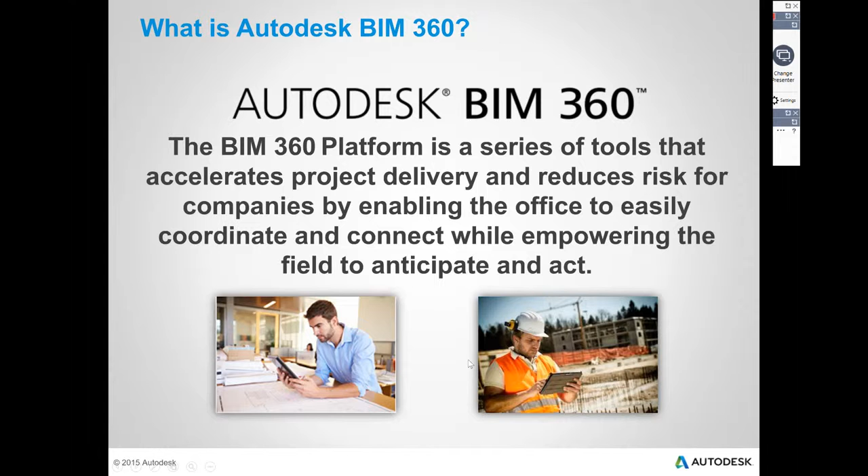So a key part of this is being able to access this data from really anywhere in the world on any device, and get to the information that makes the most sense for you. Again, it is an entire series of tools, and I'll show you a little bit more about those in a few moments.

Some of the things that we've been hearing about BIM 360 as a platform, and some common misunderstandings: that maybe it's only for the BIM manager, it's just a series of different tools, individual tools with a fancy name. Hopefully we'll dispel some of these myths and misunderstandings for you here in a little bit. Some people have said it's only for contractors, and that's definitely not true.

It's really built for design teams all the way through even handover of this data over to the owner of the building once the design is complete and handover is happening. It is a collection of apps. It does say iOS there on the screen, but we do have Android access as well now, iOS, web-based. So really, it's all about working on the device that makes the most sense to you.

If you're on a desktop PC, on a Mac, have access to a browser, you can get to this data. Or if you're on a mobile device, even all the way down, in some cases, to the phone level, you'll be able to get to this on a smartphone as well. And then some people just think that this just means Glue. And if you don't know what Glue is, we'll talk briefly about that here as well.

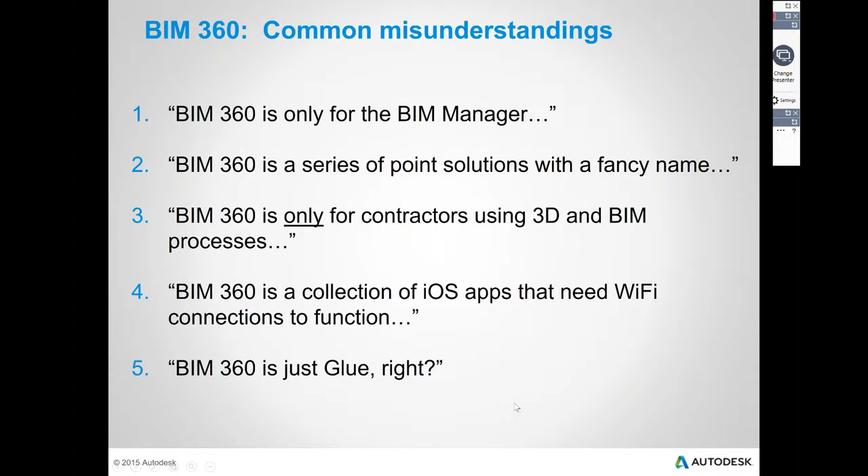So as we move forward here, let me give you an idea about this overall platform first of all. So let me go ahead and start building some of this out. We're going to start with that one called Glue right there. And I'll explain a little bit about how these different workflows, these different components of BIM 360 work. And then we're going to really dive in deep on BIM 360 Docs here in just a moment.

So BIM 360 Glue is a tool that is really used for the design and pre-construction phase. It allows us to essentially glue models together via the cloud, meaning that I can take disparate models, one from the architect, one from the mechanical engineer, another from the structural engineer. Each one of those disciplines can post or glue or host their models in the cloud. And then the other users can glue those models together and do things like clash detection and coordination on them.

Our next tool that works in conjunction with Glue, that you may not have heard about, is called BIM 360 Layout. BIM 360 Layout is really a two-part application. The first part is a plugin that runs on top of AutoCAD, Revit, and Navisworks that automates the placement of 3D points, these X, Y, and Z points, into your models, into your families if they're Revit, into the different components if they're AutoCAD or Navisworks. These 3D points describe the model in space. The second part of the app pushes that point data out to the iPad app to quickly connect with the guys in the field.

So this is really what it is. It's about connecting your entire design and construction project teams and all of your documents in one system. BIM 360 Docs is rapidly evolving. Since last January, we've consistently had about 2 releases a month, so the product is being rapidly iterated. In fact, if some of you had looked at Docs maybe 6 months or even a year ago and decided that it wasn't quite where you thought it needed to be, this is the time to go back and take another look at it, because it has come a tremendous way in a very short period of time and continues to evolve.

And Docs is really going to become the backbone for our cloud-based system. It will be the repository for all of your drawings, all of your models, anything else you might have for a project. But then those models will be accessible to all of these other tools, even to your desktop applications like Revit and Navisworks and AutoCAD going forward. So you can think of this not only as a document management tool, but also as a centralized repository that will allow your teams to assuredly have access to the latest and greatest information, unlike what you might be doing today, which might be some information stored locally on a file share in your own office.

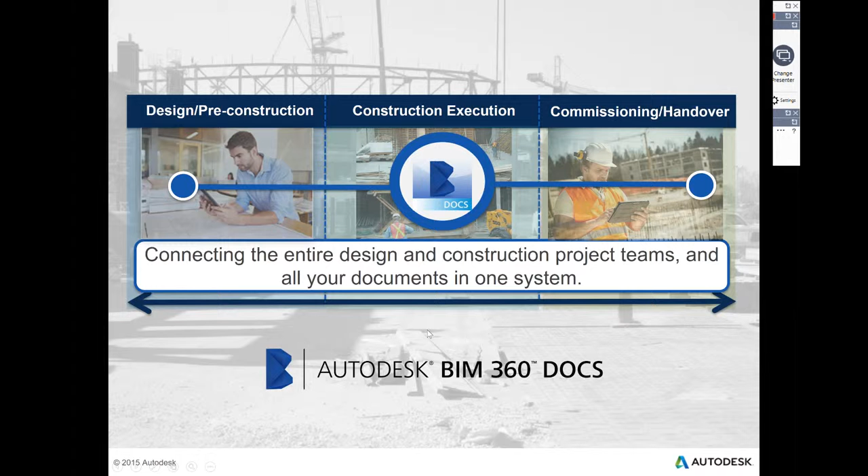My office used to have what we called our P drive for projects, and that's where everything was stored. And then I'd take a Revit file and email it to somebody, and as things like Dropbox and Box.net came along, and even before that, FTP sites, we'd make another copy and stick it on an FTP site. And before we knew it, we'd have documents all over the place, and nobody knew which was the latest and greatest, because we'd end up with file names like project file 1-final-final, right? We laugh about it, but I see it happening still today over and over again in architecture and engineering companies, people not understanding where the latest and greatest information is. So that's really the heart of BIM 360 Docs.

And so it is, again, designed for that entire team. I'm showing you a couple screen grabs here. Today I'm going to be doing everything off of the browser. Over the webinar systems, it's a little bit tougher to show you cleanly the iPad interface, but there's a ton of information out there. And in fact, we can have some AEC guys even follow up this webinar, including some links to where you can go get some additional information. There's screenshots, there's videos about the interfaces outside of the browser that I'm going to be running in today.

You can even see down here, down to the iPhone, or I shouldn't brand it, down to the smartphone level as well. I have an Apple phone, so I tend to call them iPhones. But really, the idea is anytime, anywhere access to any of the information you need by the entire project team, but also with the understanding that sometimes you can't always have online access, where you're on a job site that just has no Wi-Fi or no cellular, no mobile signal. So being able to get to this data, sync it down to your mobile device, and then have access to it even if there's not a good signal or no good Wi-Fi on the site.

Another key here is that the capabilities obviously are built around our tools, the Autodesk side of the platform, but we're not limited to hosting just Autodesk tools or Autodesk file formats in this platform. So even things like MicroStation DGN files or SketchUp files, or really anything you need, Microsoft Word documents, Excel, etc., can all be part of the information that you end up storing as part of this overall document management system. It's really meant to be a single source for you to keep all of your project data.

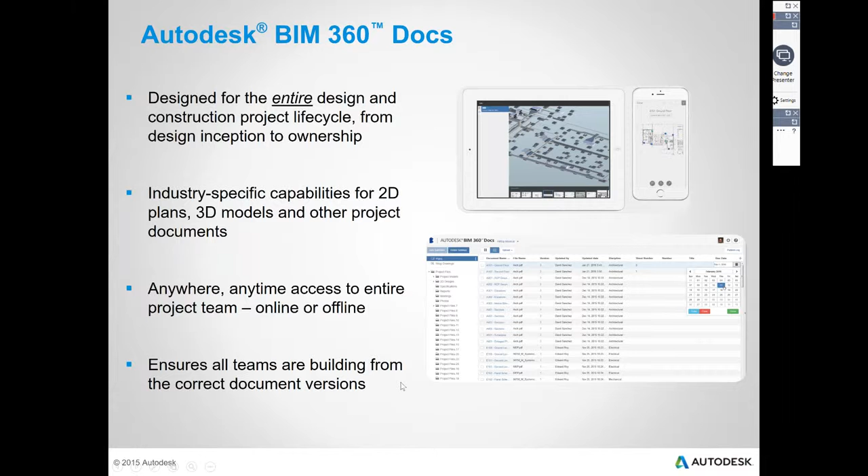But key here, it's not just 2D. There are other solutions out there that are competitors with Autodesk that are 2D only solutions. And they kind of hide the fact that they're only 2D, and really after you dive into them at some point you find out, well, what if I want to view a 3D model? And then they point you over to a third party or another application that you have to go download and ultimately pay for in order just to view 3D models. So ours is completely 2D and 3D from all of our applications and even beyond that, outside of the Autodesk realm of applications. Okay. And I mentioned this already, it's assuring that all the teams are building from the correct document versions at any time.

All right, so I told you I was going to go through some quick PowerPoint. So that was the PowerPoint deck. Pause for a moment, catch my breath. I tend to talk quickly about these things. And let me go ahead and fire up, there we go, back into my web browser.

But, as I was saying earlier, really what's going to happen is that these things currently today function as separate applications, but if you watch here coming soon, and I can't give away any exact dates, but just continue to watch our BIM 360 pages, what we're working towards is a really comprehensive solution where these things are all melded into one blue box where accessing one of them gives you access to all the different various tools.

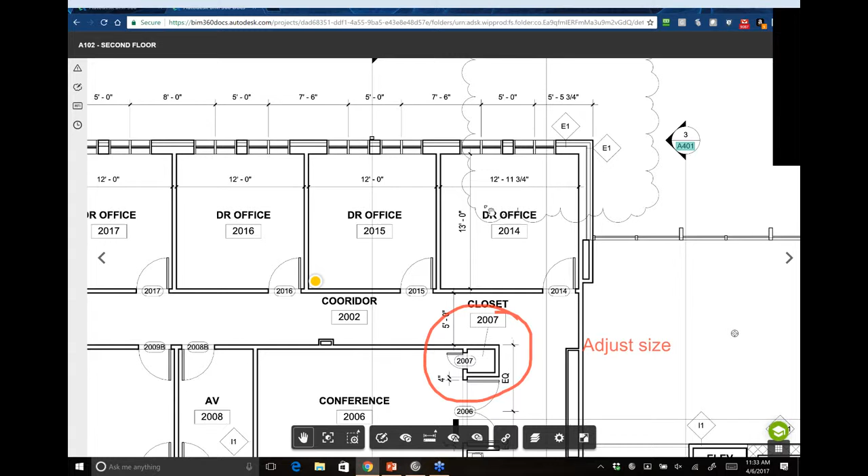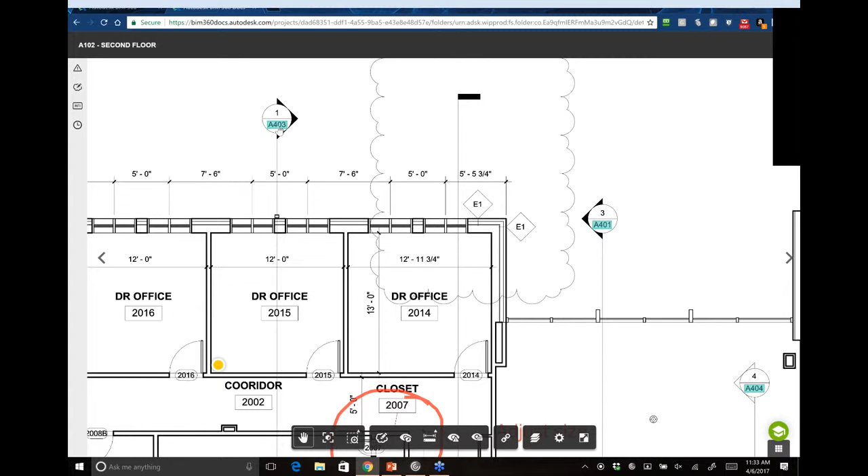So, in essence, it looks like a drawing file, right? And if you didn't know any better, if you were used to a PDF-based process, it looks like a PDF, right? And I'm going to explain some of the other stuff going on here in just a moment. We can browse around the sheet. You do see those hyperlinks that automatically came across. So, section 3 on A401, section 1 on A403. If I want to go explore that, of course, it's just a hyperlink. I just click on the blue box.

It gives me a thumbnail first to make sure that that's really where I wanted to go, and then I just click view, and it's going to take me to that next sheet, and then the next sheet, and then the next sheet. As far deep into the set as I need to go. And then if there's something that did not get automatically hyperlinked that I want to hyperlink on my own, we do have an add hyperlink button down here in the toolbar across the bottom, and that's what this other different color blue rectangle is, a hyperlink that was manually created to a different part of the document set, or even to a different document that's part of our BIM 360 Docs site.

So, maybe this went out to a spec section that was in another folder, and we could do that as well. And then if I go and maybe drill down here into another view deeper, we're going to build that return list over here.

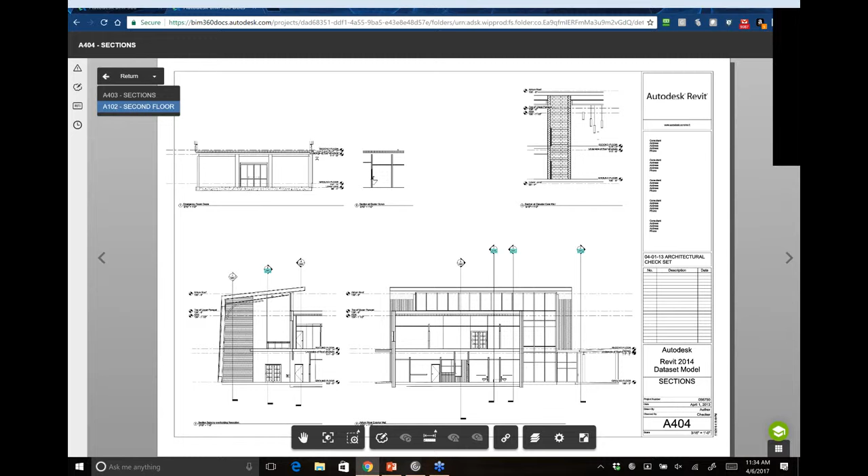That's going to allow you to go back, basically, if you need to go back a sheet or two sheets, or you've gone 10 hyperlinks deep building out this list, and you want to return all the way back to the very first sheet you're on. You can very quickly and easily go back.

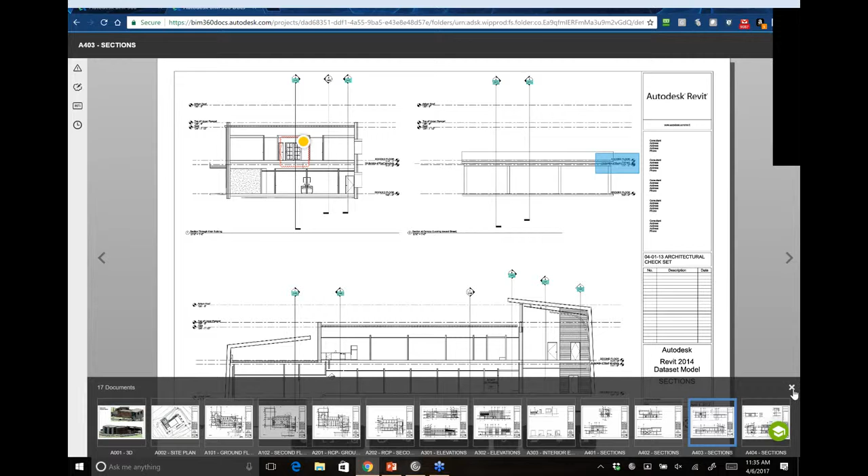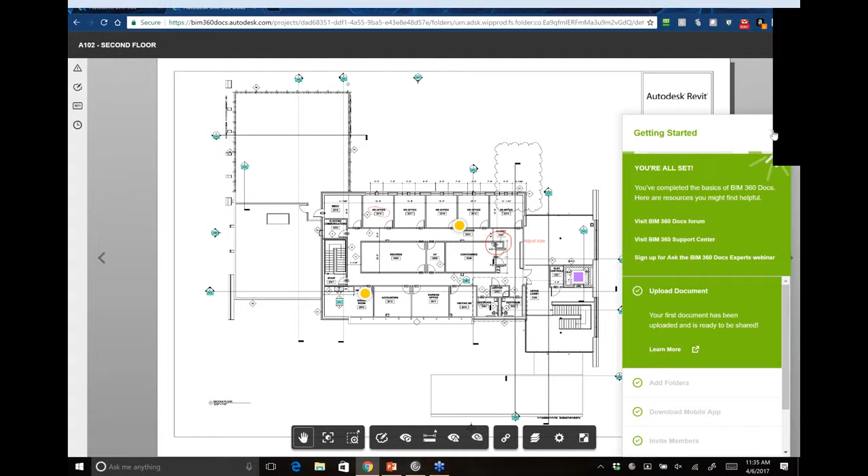I should point out, this little green scholar hat down at the bottom that looks like a graduation cap, that's your Learning Central. So if you have any questions along the way, or want to go through a quick how-to learning guide, you can click on this. It's going to bring up your Getting Started guide about how to upload documents, add folders, get to the mobile app, invite people to your project, so on and so forth. So you can get started in this BIM 360 Docs technology really, really quickly.

All right, so what are these other things going on here? I've got some yellow dots, a red markup with a little bit of text, and a purple square. Let me go ahead and turn a couple of these off for a moment. We're going to come back to them.

First and foremost is markups. Here are the toggles at the bottom, but right now I'm in the markup panel, which I can hide as well. I've got one markup right here that says we need to adjust the size of this room. Somebody left a note. Let's go figure out a little bit more about that.

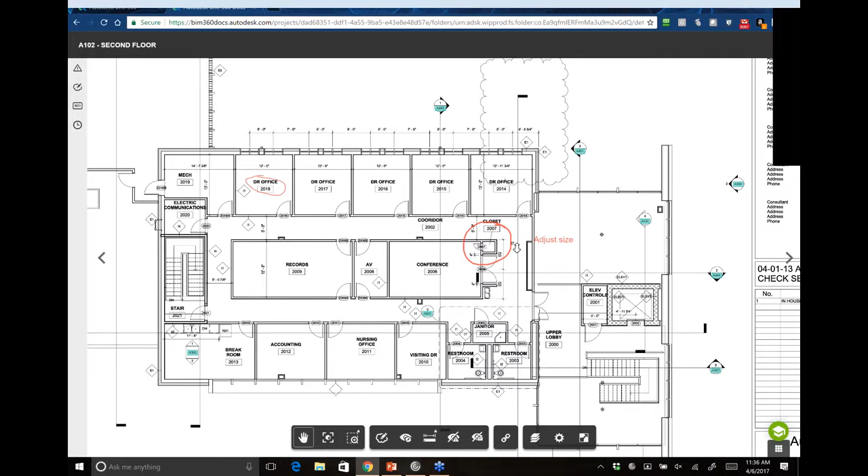In my drawing panel over here on the left, I'm going to go into that markup panel and realize that that particular markup, if I click into it, it's going to highlight. So here's the one it is. It's called adjust size, was created by Joe Gould on March 13th, and was actually created with the current version of the drawing set. There's been no attachments with this markup.

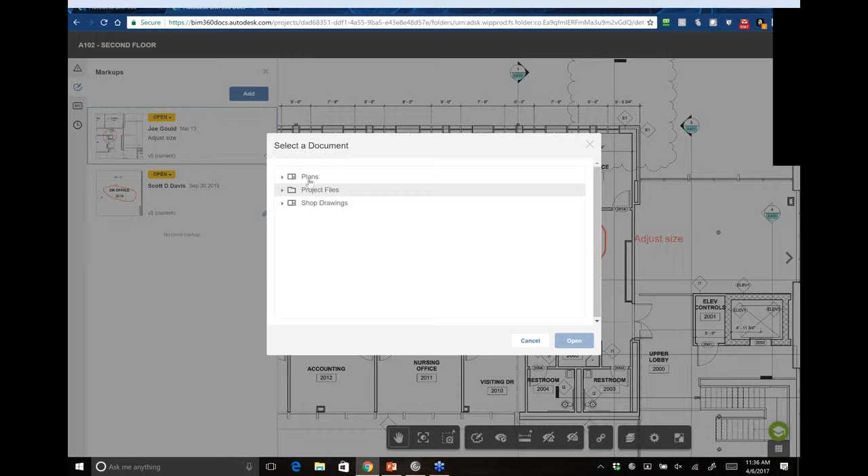But if we needed to, or if I needed some additional information, I could come into this little paperclip and browse to another set of my BIM 360 Docs project site and basically link in another document into this markup. Maybe we need that for a little bit more information, or maybe it's a job site photo or something else that I want to link in to help further clear up why this markup was created in the first place.

But what's really nice about markups here is they live on with the document set as long as they're open items. So if we go ahead and upload a new document, a new Revit file, to this doc site, and it becomes version 6, this open markup that has not been resolved yet is going to live on with the document set because it hasn't been resolved.

But once it does get resolved, we can go ahead and close those out, which will then, in essence, leave them as the versions come up, leave them for history, but we can always go back. They're always going to be part of this markup panel and review where the markups were in the history of the project. So a really, really nice feature.

And then adding new markups is really simple as well. Click the Add button, your cursor changes into a little crosshair, and your tool set across the bottom changes. You get a series of boxes, circles, clouds, freehand, some quick arrows, text, and even different color sets. So if we want to go in and change the color of a markup, or change the overall pen thickness, I can do that.

I'll just go ahead and quickly, I'm on freehand — if we needed to, this is what ends up happening in these drawing sets we have for our demo data sets, is we end up having markups all over the place. But if I wanted to create a new markup there, I could, and add a little bit of text about what that was.

When I click done, it's going to automatically add it to my markup panel over here. In fact, let's just do it. I'm going to click done to show you. So here's my new markup - it automatically author stamps it because I'm the one making it, and time stamps it, so I know exactly when that was created. In fact, the entire team now knows when that markup was created and who it belonged to.

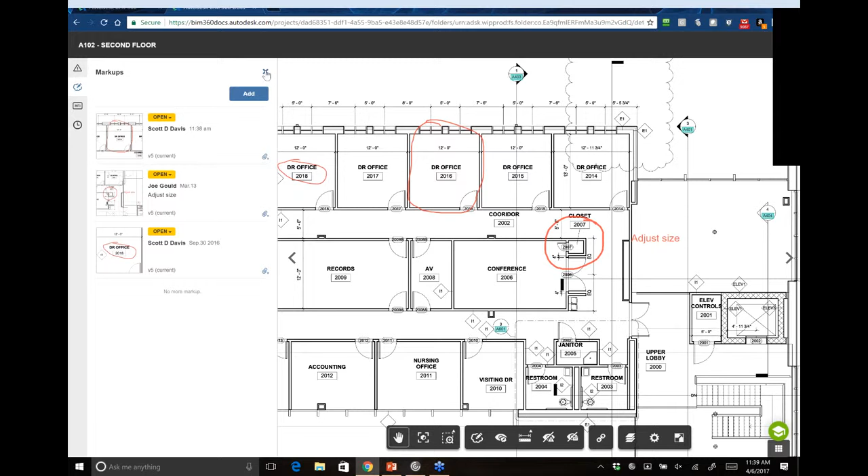Of course, we can close out that view to filter the markups for this particular sheet. So I'm going to zoom back out here. The next thing down are issues - we can actually do issue tracking inside of Docs as well. When I turn on the toggle for those, let me turn off our markups for a minute to keep it clear. That's what these yellow dots are - they're actually push pins identifying an issue directly on this plan.

So if I come into my issue tracking log here, I can see I've got 2 open ticket items on this drawing. Ticket number 11 was due, and it's still open - oh my gosh, our project's way behind, it was actually due on July 29th of last year. I've got another open ticket item, a drywall crack, probably a punch list item that was created by Joe and assigned to Michael back in March - oh, St. Patty's Day was last year, so that's when that one was created.

Of course, as you get into projects and these lists get longer, we can do things like filtering these out. I could say just show me all the open ticket items assigned to AP or anybody part of my project, and show me all the ones assigned to just myself. In this list, it's not going to show me all that - or filter by created between a certain set of dates, or due between a certain set of dates, and then it filters out that list for me as well.

And of course, I could just go ahead and sort these things by creation date as well - new to old, old to new. Show me the ones that are closed. It's all different ways of organizing this data to make it more clear for you in your projects.

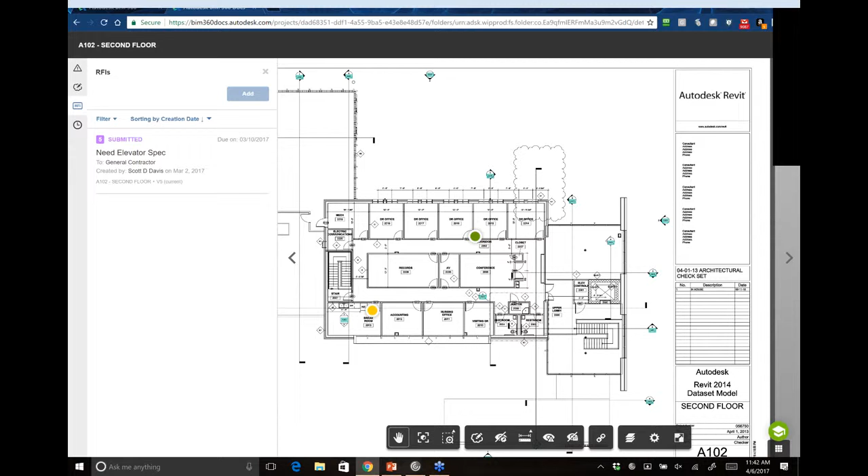A couple other things here. The next one down is our RFI. We talked about having, this is a fairly new part of Docs, RFI tracking. These are the square push pins.

Let me go back out here because I have another sheet of this set, A101. It's a little more messy, with a few more markups and things going on. Let me turn off the markups for a moment and hide our issues. I've actually got 4 different RFIs going on this particular sheet.

Again, I can see them all here—the ones that are color-coded that have been answered, and the ones that have been submitted that don't have a current answer yet. In fact, some of them weren't even created with the current set of the drawing set, but they're still living on because they haven't been closed out yet.

When we create an RFI, depending on our role—if I'm a subcontractor, it automatically routes through a proper workflow channel, to either the general contractor or the construction manager, depending on the type of job. Then it's up to that general contractor, the ball in their court, to put it in their inbox and let them know they have a new RFI, number 4, that's been submitted.

They could then respond to that, mark it as answered, or mark it as needing more info, passing it along to the next in the ball-in-court chain, which would be the architect. The architect can then do the same and pass it off to his consultant team. Obviously the approvals, as they go through, work their way all the way back to the person that originally asked the question or posted the RFI.

There's additional information that can be hosted with these things. Here's a threaded response of what happened in this particular one—this is when it was created. Here, Joe attached a schedule; his question was, we need to know what door type this is, and he posted the schedule information as well as a drawing sheet. So we've got this response going on here.

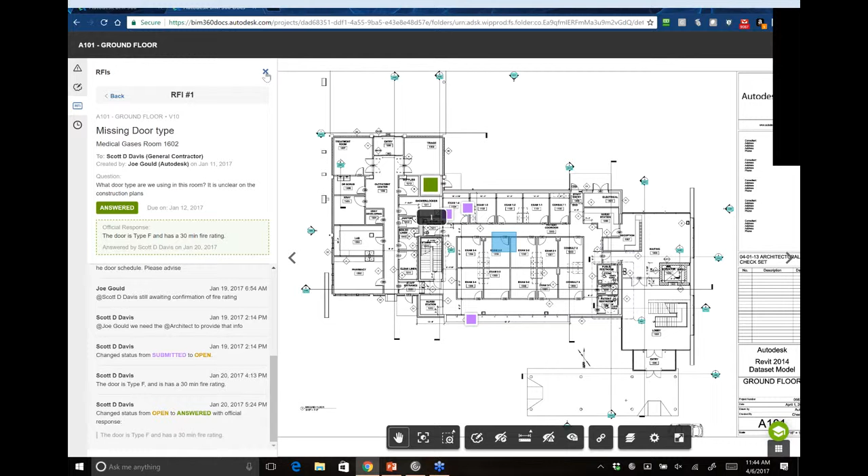Again, because it's cloud-based, anybody with access to this folder and permissions to this particular set can go look at these RFIs, review them, and be part of that process. The last button here is an entire history, so you can see what was uploaded and when—we'll jump into more of that history in just a second.

Alright, I'm going to close out—I've got to move my GoToMeeting window here just a little bit. There we go. So I'm going to move out of the sheet, and let's go take a quick look at that 3D view, because of course, with a Revit file, you're going to get the 3D model along with it.

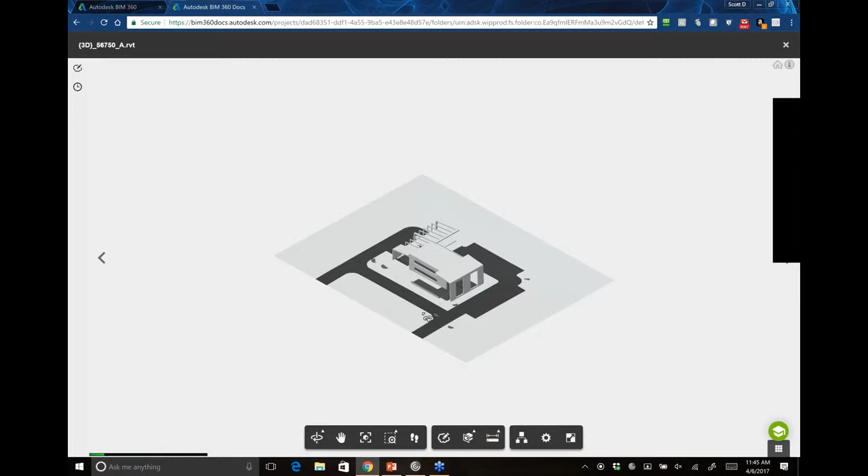Again, without having to make any special file format, without having to make a PDF or 3D PDF, or post a file that some other user would need a special plugin to download and install—and they probably don't have rights to install that plugin—they're going to have access to these models instantaneously.

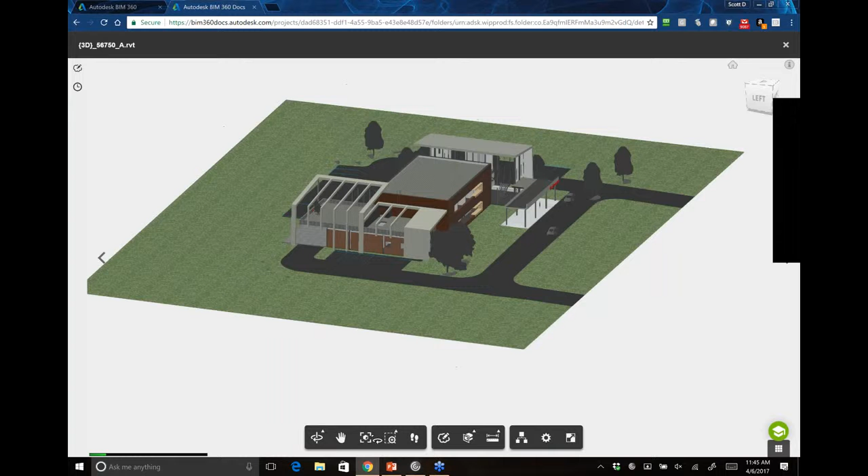So maybe a non-Revit user, a project architect or project engineer who never uses Revit, wants to visualize the model. They can jump in and orbit around, pan, and view—you've got your entire set of tools along the bottom. We can even do a walk, which basically lets us push forward in the model. Oops, my walk isn't working today—maybe it's the GoToMeeting or GoToWebinar messing us up.

Normally, what I would get would be to walk forward in space. Right now, it just wants to pan and tilt. So I'll have to go back and check that out and see what's going on there. But I can actually add markups inside of a 3D view.

We do not have the issue tracking or the RFIs inside of 3D models yet, but it might give you a clue that I say yet. So just watch our site, and I think you'll be happy to see some of the changes that are coming soon. Of course, we can measure as well.

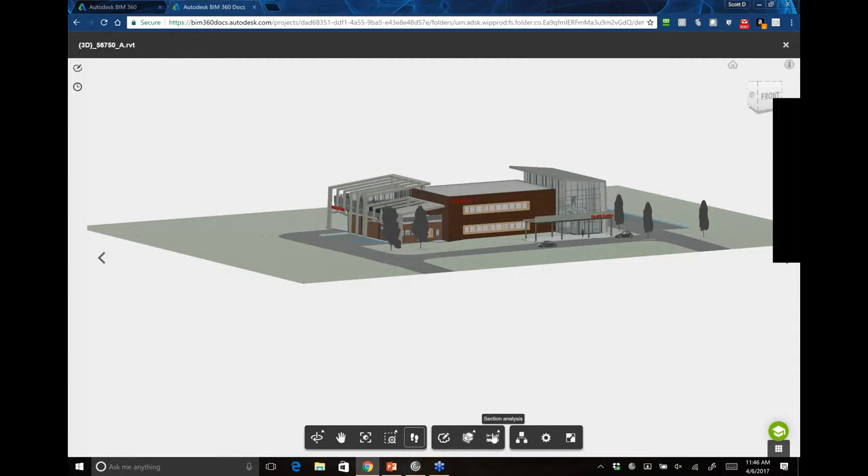So we can come in here and I can measure object to object. I can set my unit. So if I want to be in feet and fractional inches, or I want to be in metric, we can do that. Then I can just simply come in and start clicking on different objects in the model set. Maybe let me come back to turn off my walk here. Zoom in a little bit tighter, and we want to know how far maybe it is between these different windows. Wow, my zoom is really slow today.

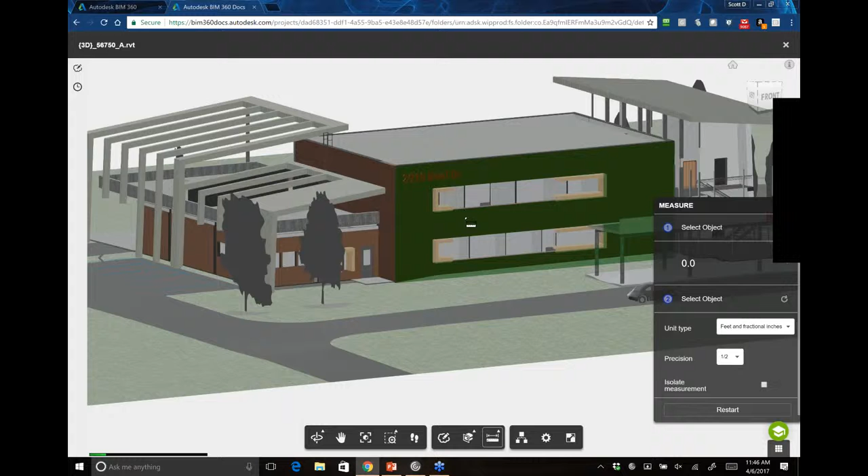All right, we can go from here, maybe to here, and I'm purposely going to go off axis a little bit, and that measurement's going to tell me, in the Z direction, straight up and down, you were 7'4" in this case, but you were off in the Y direction. If I zoom a little bit tighter, you can actually see it. It's telling me where I kind of measured across these objects, so I can get a really accurate idea of my overall measurement. So that's obviously a nice capability.

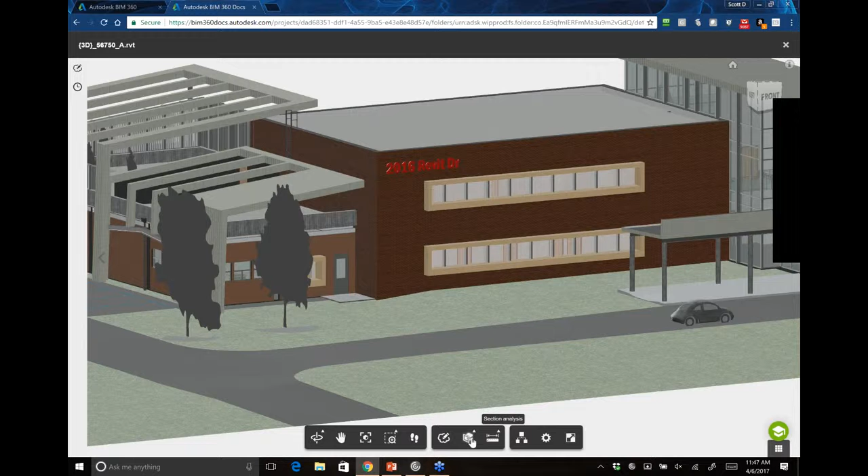And then just 3D section capability. So being able to take this thing and slice it by X, Y, or Z planes. I just did a Z plane for now, and if I tilt back up here a little bit in our view. Here's the other thing, besides my scroll not being very fast, but hopefully this is coming through the GoToMeeting. I'm purposely not moving my mouse extremely fast, but on my end, it's smooth as butter, so to speak.

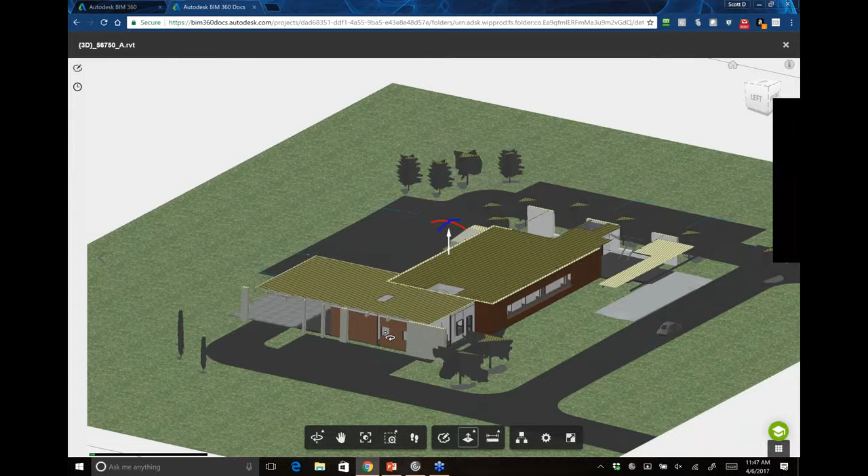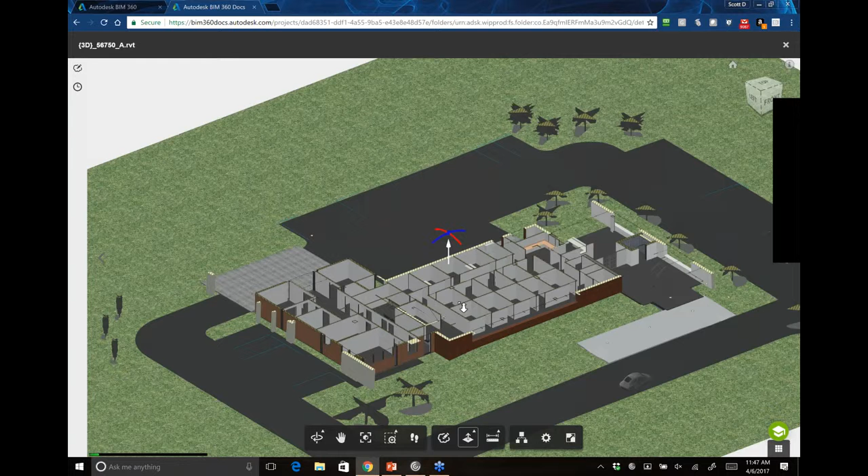And it doesn't really matter the size of the Revit files that you post here, the models. It's all very smooth and very easy to get around these models and do things like 3D sectioning. Of course, I've chopped down through the roof and the upper floor here to reveal the kind of axonometric floor plan view, if you will.

And then, of course, one thing I haven't even mentioned yet that is nice about all of this stuff, whether it's 2D or 3D, and I can go back and show this to you in a drawing, is it still has all of the I in BIM, all of that information. So really all the parameter data that came out of the Revit file, whether it was the constraints, the dimensions, the identity data, the materials, the assemblies, the type mark, etc.

It's all information that is still embedded in these models that you don't get with a lot of other file formats. And that's one advantage we have of really dealing with that native RVT file format, is all that data-rich environment comes across as well. Okay, so that's a couple things you can do there.

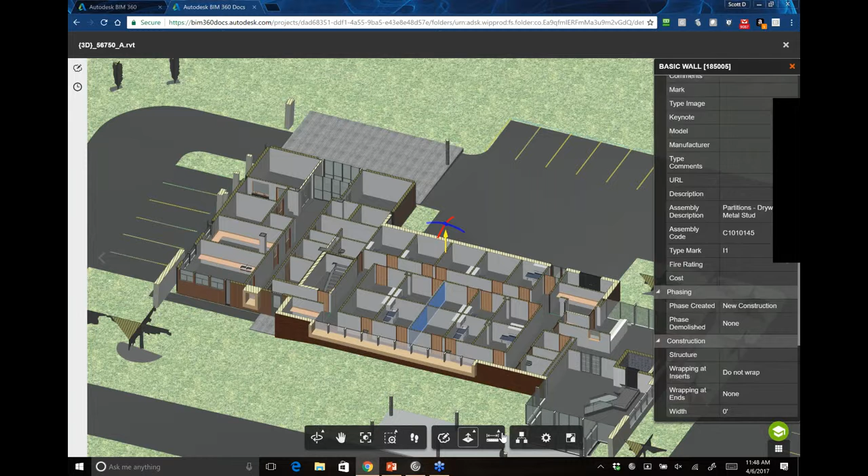Of course, there is a model browser as well that allows you to go through and do things like isolating out all the doors or the different walls. And so you can see it's kind of ghosting out the rest of the model at this point, so we can just see the items that I have highlighted. And of course, you have visibility control as well, so I can come in and right-click, and I can say, hide selected, and it's going to start turning on and off walls and allowing us to see various parts of the model. If I need to turn a roof off, I can select on it and do that as well.

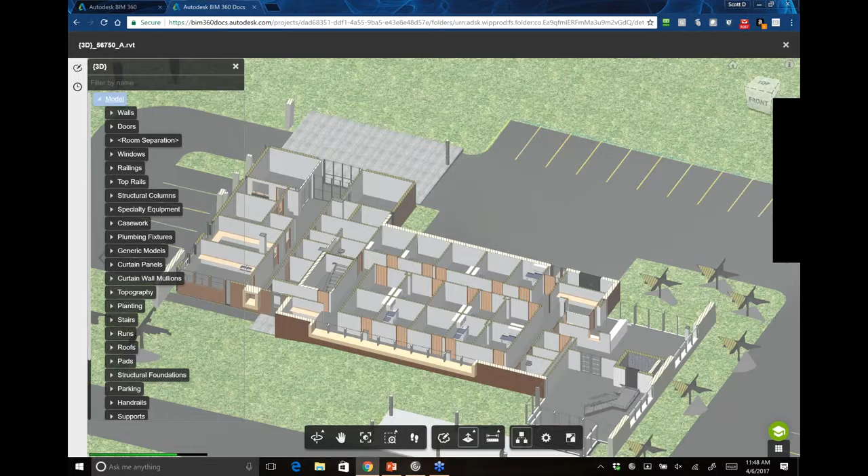All right. Got about 12 minutes left, so I'm going to try to get through a little bit more of this, because there's a couple other things I think that are very, very compelling here about Docs. One of my favorite features is,

myself, I said I was an architect. I practiced for about 14 years prior to joining Autodesk, and a lot of these kinds of tools obviously didn't exist yet. Revit was still, I will say, fairly new. When I left, it was about Revit 8.1, I believe, or maybe it was in the yearly versions, 2008. But having tools to help us figure out what changed between drawing sessions. I was still using a normal light table or overlaying drawings on my desk to do coordination checks.

So, one thing that used to frustrate me a lot was just getting files from consultants. And this works no matter if you're the architect, the engineer, vice versa. When changes get made, it's so hard to go through a drawing set and cloud where that change affected the drawing set in its entirety, right? Or if you do, then the drawings just become a mess because you've got clouds drawn all over the place with revision bubbles.

Wouldn't it be nice if there was a system that actually automatically showed us what changed between different versions of drawings? Well, we have that here. So when I go over to the version number, I'll do it on the ground floor plan, and I click on the version history, it's first going to show me the entire history here. And then down here at the bottom, it's going to say compare versions.

So what this allows me to do is basically check off 2 drawings at a time. So I'm going to turn those off, and I'm going to say, show me all the changes between version 1 when this thing first got uploaded, and version 5. Some of these were actually reverted back, so you have the ability in Docs to roll back an individual sheet inside of the drawing set as well. But in this case, I'm just going to compare version 5 that was done in July with version 1 that was done in June, hit compare.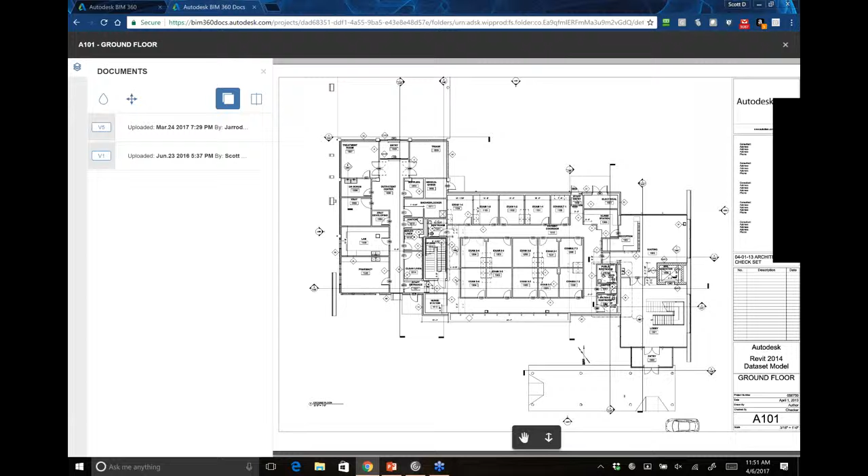And what it's going to do now is overlay these drawings in a virtual light table format. So there they are. You have two of the exact same floor plan drawings, but different versions overlaid on top of each other. It may be a little bit hard to see some of the changes. If I zoom a little tighter right here at my cursor, you can probably tell that this exam room 2-4 actually has 2 doors in it. One of them is a little bit grayed out, screened back.

And I like to compare that to a real light table where you had 2 sheets of paper, and the one on the bottom was a little bit more gray than the one on top. So you can start seeing changes like that, but to make this really apparent, we've added the ability to add color as well. So now you can see that version 1 of this drawing set was red and version 5 was blue, and now those changes really start to stand out.

You can see that the door at version 1 was over here, and now it's over here in blue. It moved across to the other corner of the room, and in turn, it looks like some dimensions got shuffled around a little bit. So this isn't just the modeled objects, but also the annotation objects. And we're in the straight overlay mode. If you want to, what I call, flip the sheet on the light table, you can go into slider mode, which allows you to grab the slider control and flip that sheet back and forth. So here's before in red, and as I slide across the exam room 2-4, you can see the before and after in that view.

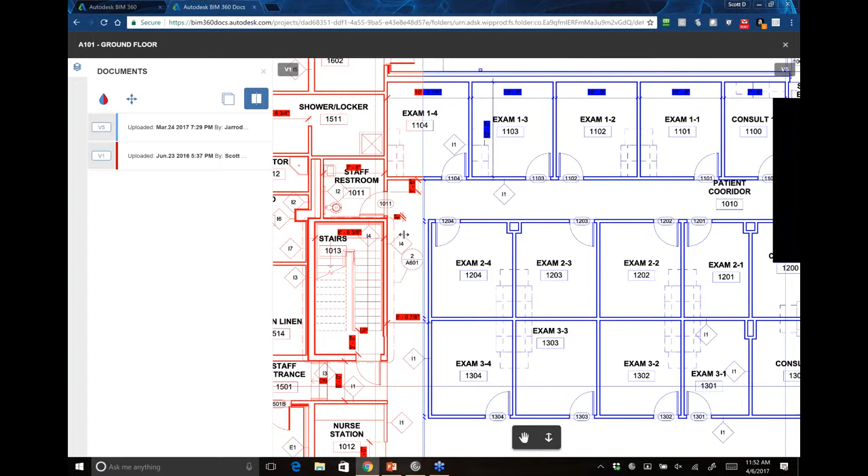And not only does this work with the color turned on, but it also works so you can see it in what would be printed output as well. So black and white mode, but still with the color coding of what changed. Some dimensions have moved, the door has changed a little bit, so you can really easily identify where things are different between the different drawing sessions.

Now, if I would have had this tool back 10 years ago, oh my gosh, this would have been a lifesaver, right? Understanding between different versions that I got from my consultants what changed, whether it was structural, mechanical, electrical, and being able to see those changes so I could react to them immediately, or provide information back to my consultant saying, hey, my structural, we can't move that beam or that column there because I've got this other part of the design. It just would have facilitated having a conversation about these things in a much easier, much more transparent way, doing it through BIM 360 Docs like I'm showing you today.

All right, so a couple other things I want to show you. I've basically been at our folder level the entire time here today.

So this is where we started off with adding folders and subfolders, and we went to browse an RVT set, 2D and 3D, and I showed you the drawing compare feature. Of course, you can search as these drawing lists get long. We can go in and start searching for documents inside of this.

I can look at the publish log over here at the top, which is going to show me when these files are actually uploaded. And I've actually got, somebody's got one uploading and being analyzed now. So you can see where they're at in their process. I'll close out of that. Being able to view really into this document.

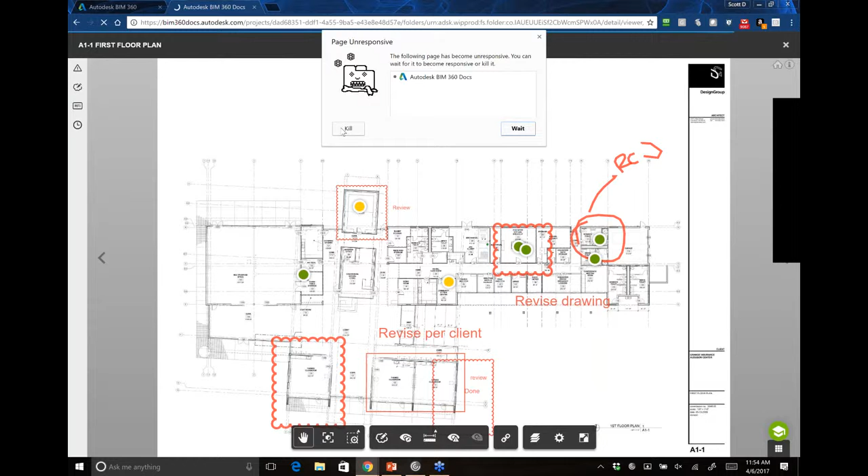My browser froze, I believe, in context here, so let me see if I can get that reloaded for you. All right. Always a snafu when we're doing this stuff live in front of people. All right, so I'm going to kill that browser tab, and we're going to go ahead and reload it here. But quick and easy to get back into. All right, so we're back in that sheet. If I flip over to the next document, there we go.

Talked early on about defining a title block and then doing automatic hyperlinking. And when this PDF view pops up here in a moment, then you're going to see the hyperlinks embedded in this one as well. Or maybe not. For some reason, my browser, my machine is not liking this particular file set today. So usually it's up by now and would be on the next sheet. Maybe I can go to a thumbnail and nope, it's going to crash the browser again.

So I'm going to have to look into that. That's something going on my end. I'm not sure if it has to do anything with GoToWebinar or not. But let's close it out. I'll just launch right back into Docs. And then there's a couple last things I want to show you here before we run out of time. About 5 minutes left. I would browse down to that PDF section again and show it to you, but I just think there's something inherently going wrong on my end, and I just don't want it to crash again.

So at this folder level, we also have an issue log for the entire project. So we'll look at this and see that in this current project called Medical Center-SDD, there's 35 issues that have been identified. You can see that some are answered, some are open tickets. You can see who they were created by, who they were assigned to, when their due date was. And of course, we could come through and just click on the headers themselves.

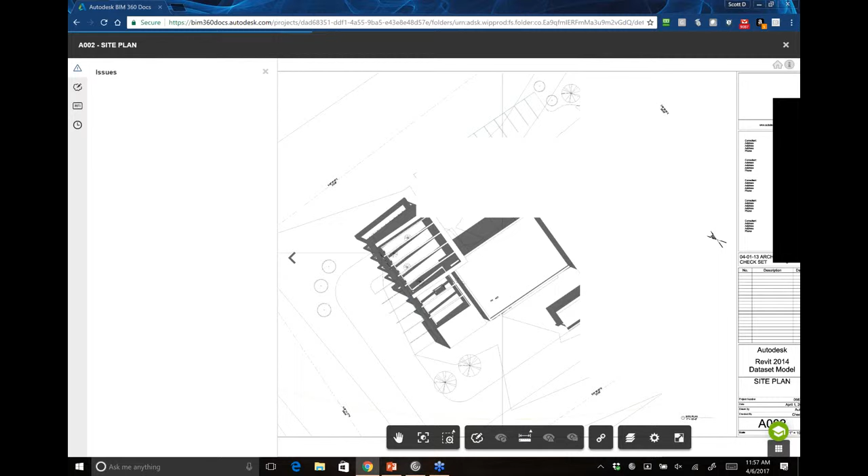And not only does it do that, but it's actually going to highlight and open in the issue tracker the exact issue and then highlight the button for me as well, or the pin in the drawing set. So that's a really nice new feature of being able to navigate directly to the sheet from the issue log on the front screen. And then that was issues, the exact same thing with RFIs.

So I get a list of all of my RFIs on the project. If I need one in particular, these are associated with some different sheets. If I want to come in here, I can say View on Document. Of course, I could come in and add some comments to it again if I needed to, or if I wanted to go view this on the document.

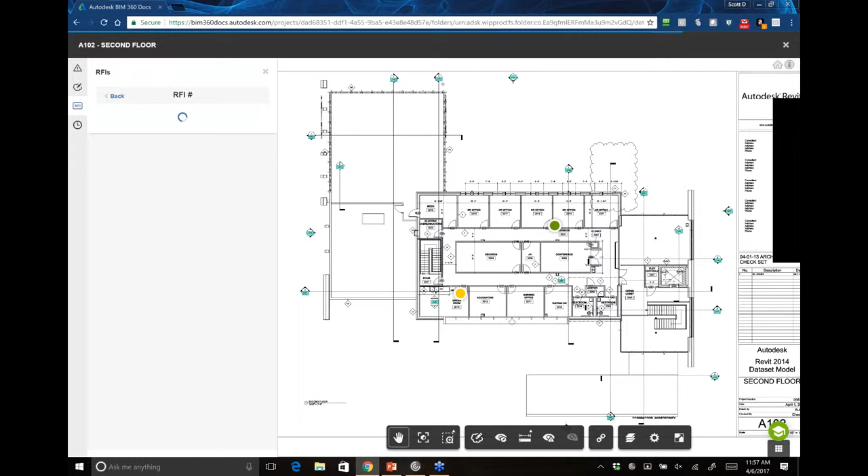I clicked on the link and it's going to open that document, and it's going to take me right to that RFI in both the preview pane down here and then also in my issue or my RFI tracking list for this exact sheet and show me where it's at. So again, some really fantastic features there as well. These, if I would have had these in practice, would have been huge time savers for me.

I told you I was going to give you a couple hints. I mentioned one earlier about what's coming up in the future with Docs. There is a roadmap document that is available, and again, the Summit AEC guys can get you guys out some links. One of them is on the Autodesk forums. So if you go on forums.autodesk.com and you search for BIM 360, you can actually find a publicly facing BIM 360 Docs roadmap.

And that roadmap outlines the things that we have up and coming. We don't really put them in any particular order or specify exact dates of when you might expect those things, but it at least gives you a good idea of where we're moving with this platform. And I can mention that submittals is part of this as well. Tying this into other authoring services like Collaboration for Revit, so I could publish my models directly from Collaboration for Revit out to BIM 360 Docs, is something we're working towards as well in the future.

So again, BIM 360 Docs is going to become this centralized repository for all of our information from a project with access from within our applications, and really become that hub, that anytime, anywhere access hub for not only document storage, but for document viewing, for markups, for issue tracking, for RFIs, for submittals, and even far beyond that.